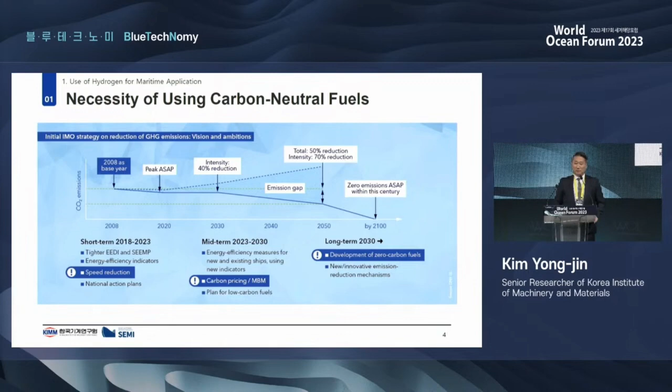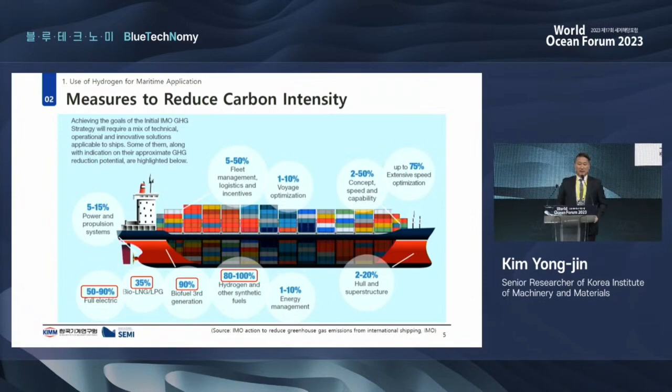There are various themes for ship technologies: operation, design, and alternative fuels. But our focus is more on decarbonization and carbon reduction technology using propulsion and fuel cells or other alternative fuel technologies. And that's the direction we are pursuing right now.

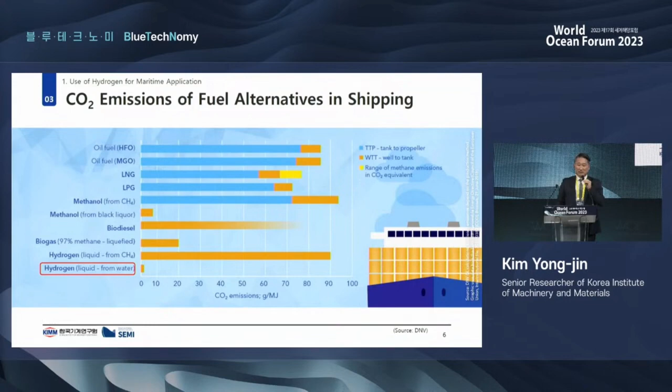In blue is tank to propeller. This is not something we are considering, but in yellow and in orange, well to tank, ammonia is not covered here. Hydrogen and liquid hydrogen using water electrolysis and green hydrogen should be actively used in order to reduce carbon emission. Using methane, you can see from the second from the bottom, compared to existing fossil fuels, you cannot significantly reduce carbon emission. That is why we have to go for green hydrogen.

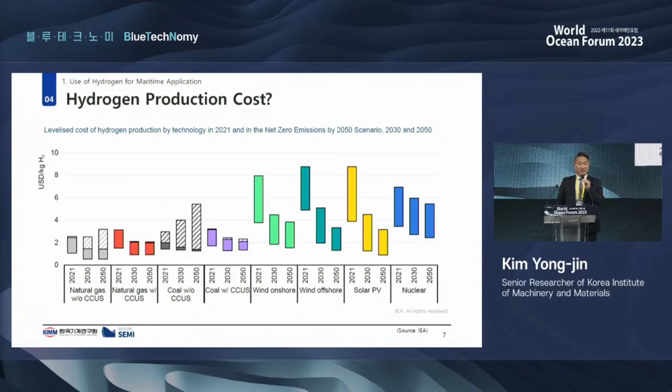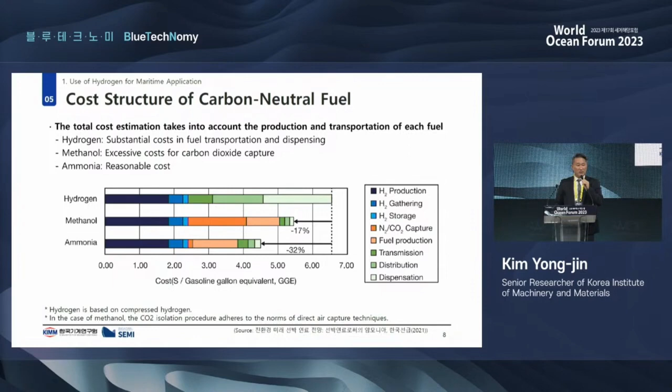Let me skip this slide. I think this is not fully updated. But anyway, there are a variety of strengths and benefits of hydrogen.

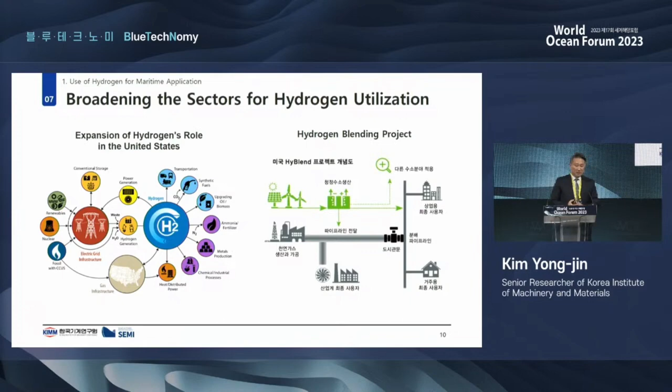But let me take an example of a U.S. project, and there is a so-called hydrogen chain. There are various relevant and related industries, academia and communities to be formed. On the right side, you can see the operation of cars and operation of vessels, and such value chains or supply chains have been built. So as a fast follower, I think we can learn from the case of the United States. Now I'd like to turn to hydrogen storage technology.

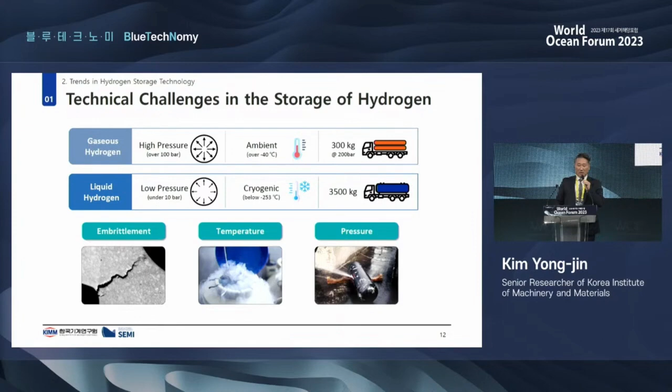Gaseous hydrogen and liquid hydrogen still have some challenges. The three most urgent challenges we have to tackle are embrittlement, temperature, and pressure. In the case of gaseous hydrogen, it's such a high pressure, over 100 bar. And in the case of liquid hydrogen, it should be kept at an extremely low temperature, below minus

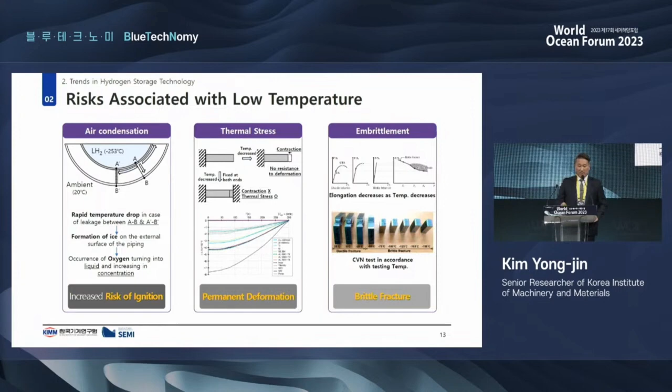200 degrees Celsius. And on the first column on the left side, if there is any leakage from pipes or insulators, then icing will take place, and there will be too much concentration of oxygen. If there is any ignition, then that would lead to a big fire. So this temperature factor should be overcome and successfully addressed in order to facilitate the introduction and adoption of hydrogen.

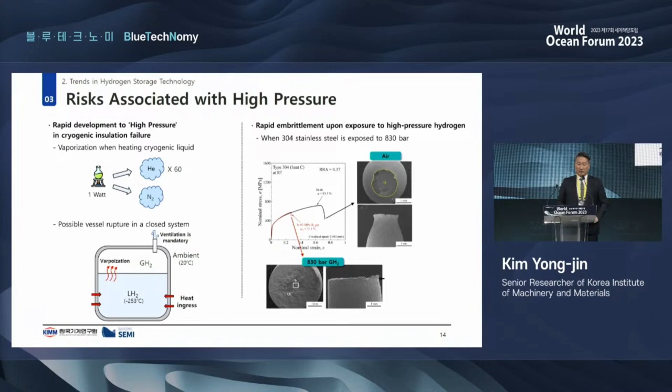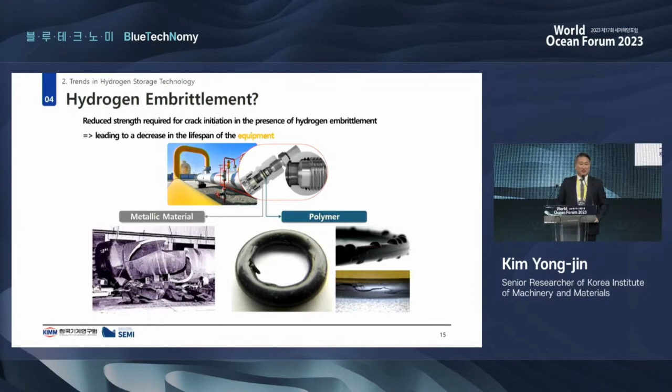Anyone who is working on hydrogen would talk quite a lot about embrittlement. That means small hydrogen molecules would be absorbed into metal, and that might lead to some rupture and cracks. And this is also a technical challenge we have to tackle.

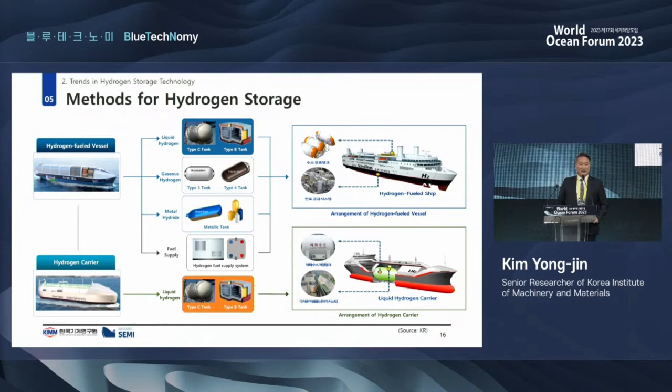In hydrogen-fueled vessels and hydrogen carriers, there are various types, and Type C is the most promising technology for storage. In Norway or France, a membrane-type storage vessel and container is currently in use. However, up to AIP is possible, but I don't think that's feasible for commercialization.

As for technology for storing liquid hydrogen, a high vacuum system is available only for subscale, small-sized containers. In order to make this bigger, that is why we are going for low vacuum and high mid vacuum systems, somewhere in the middle.

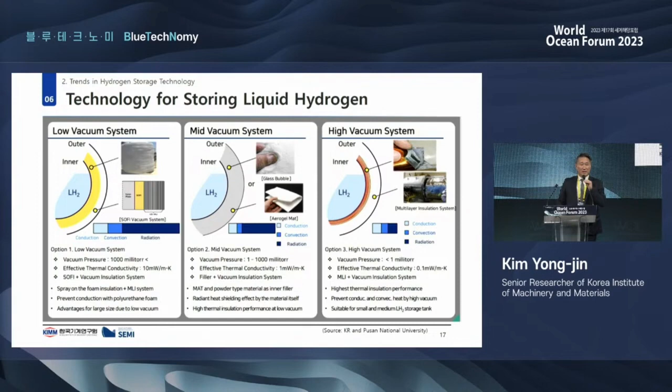There are various commercialization cases. If time allows, I would love to go one by one, but to highlight important points, as for Japan, I think commissioning has already been completed, but it's not in operation yet. That's the status. And up until 2026, they want to go for 4 vessels with 40,000 cubic meters capacity.

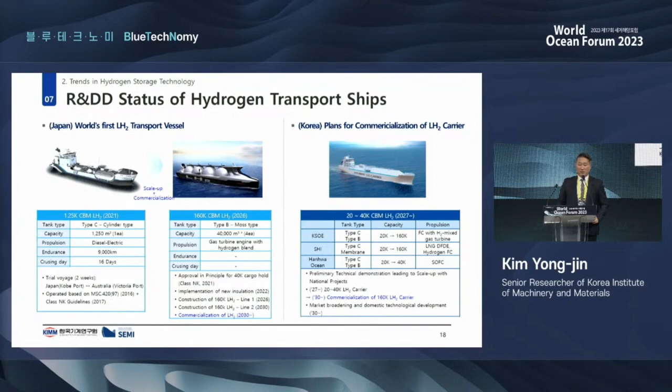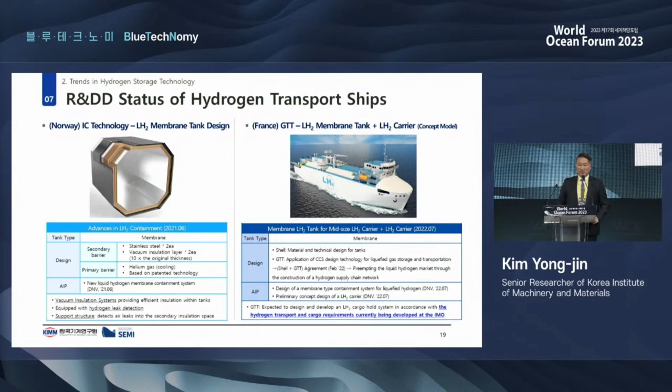And as for Korea, KSOE and Hanwha Ocean are working on commercialization of this technology. As I already talked about, in Norway and France they are using membrane-type storage containers, and AIP certification verification has been completed. As for Europe, including the Netherlands, they have set up the commercialization roadmap quite in detail.

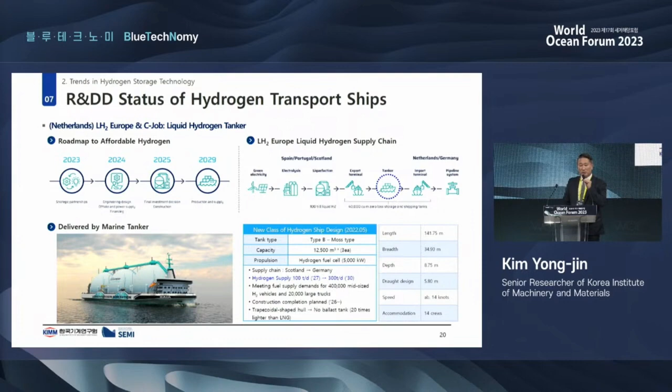In the case of the Netherlands, as you can see here on the right side, they have created this hydrogen supply chain. The key here is the supply capacity: as of 2027, 100 tons per day, and by 2030, their goal is to supply up to 300 tons of hydrogen per day.

I think we have some technical issue here. The microphone doesn't work, so interpretation cannot be provided. I'd like to ask for your understanding. Once the microphone system starts to work, interpretation will be provided.

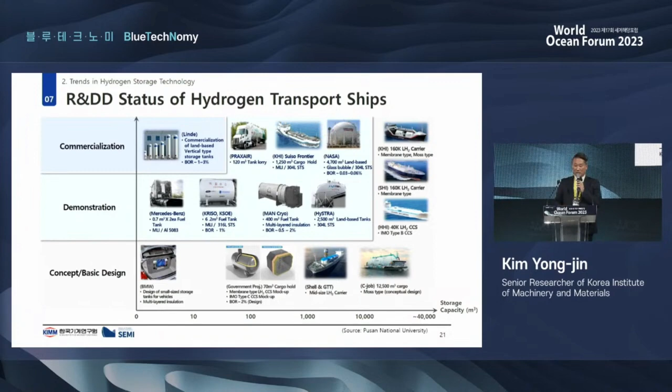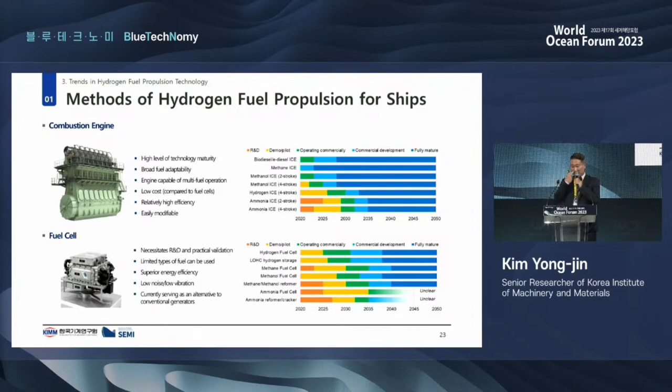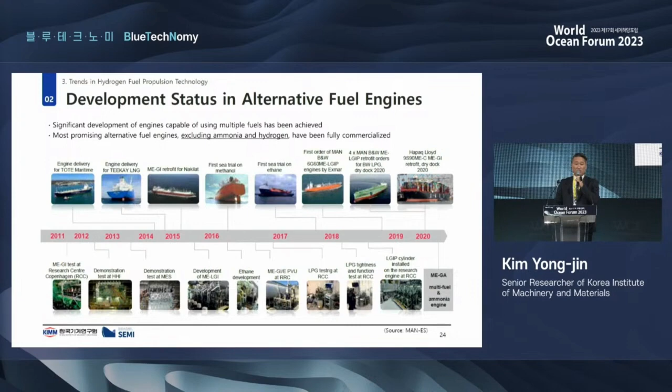But technological maturity is not high enough. I'd like to turn to hydrogen fuel propulsion systems, which refers to traditional engine and PEM-FC related technology. And there are a variety of developments on various fronts. Until 2020, alternative fuel was the area of focus, but the concept of decarbonization was not incorporated. From 2020 onward, ammonia, hydrogen, and other alternative fuels were considered for the minimization of carbon emissions, and various efforts and policies have been put forth.

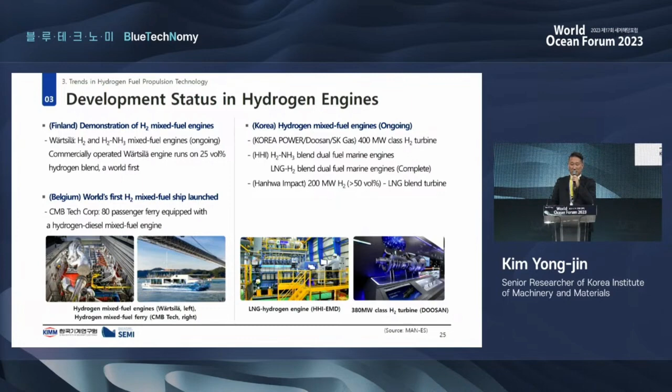In the case of Finland and Belgium, they have commercialized mixed fuel engines and mixed fuel ships. As for Korea, KSOE, Korea Power, Doosan, and SK Gas have introduced and developed hydrogen mixed fuel engines. So R&D is being carried out quite actively in Korea as well. The United States and Norway are also working on hydrogen fueled systems. In the case of Norway, liquid hydrogen is used for the propulsion system.

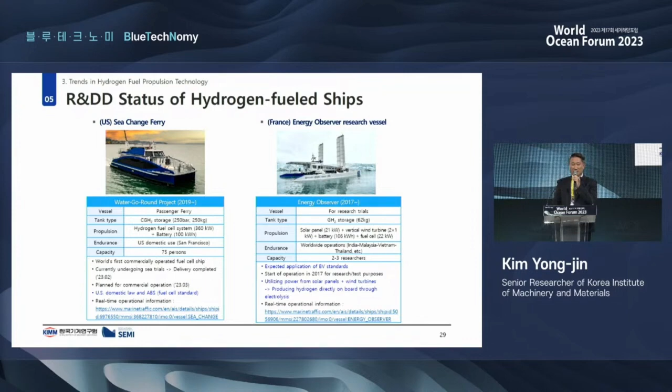So far, we looked at the status of the development as well as the technology. Now, I'd like to turn to research activities for hydrogen vessels. At my institute, items 1 to 4 are national policy projects we have been working on: material evaluation and assessment, and with specific companies, storage system development and fuel system development. We have provided guidelines as well as advice. And water electrolysis and hydrogen storage systems are the areas where we are doing our development.

I'd like to highlight number 5. This is to create infrastructure: establishment of a reliability test foundation and evaluation system for the machinery sector. There are cases where reliability test infrastructure is not there. So with a government budget of 50 billion Korean won, we are building the system so that we can render technical support for reliability testing. We are fully dedicated in this regard. And as part of the project, this is not up to date.

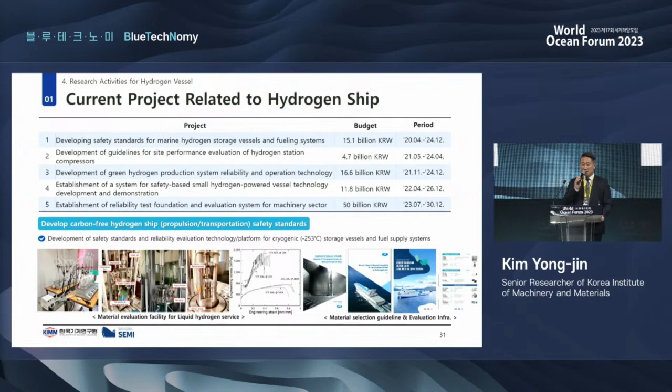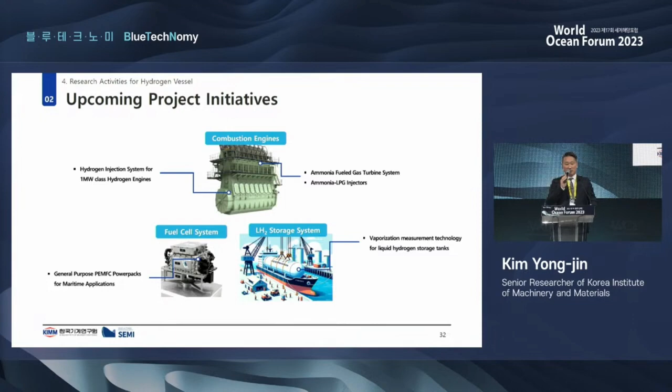These are upcoming project initiatives with the Korea Register. We are also developing hydrogen spray and various other types of technology. As for fuel cells, we are also working on a project. At the bottom, as I mentioned, vaporization can take place for hydrogen because it is stored at cryogenic temperature. That is why we are working on the development of general purpose PEM-FC power packs. Our goal is to apply this technology in the field by 2025.

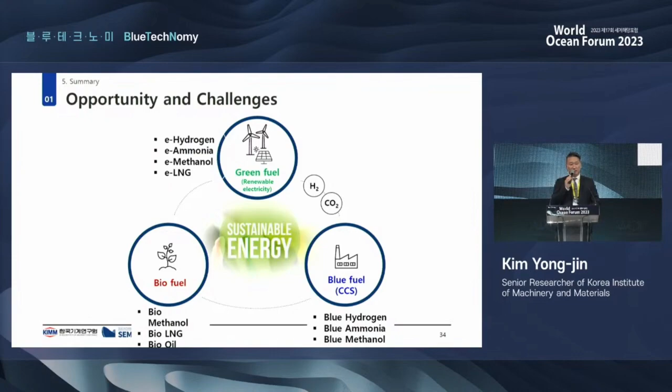This is the end of my presentation. I'd like to ask for your understanding that not the entire document is up to date, but this will give you a glance of what we are doing. As for opportunities and challenges, we are working on e-hydrogen, e-ammonia, and e-methanol. We are also developing piping as well as the propulsion system, taking into consideration the corrosive properties of the marine environment. We are also working on economic feasibility tests. And we will continue our technological development effort.